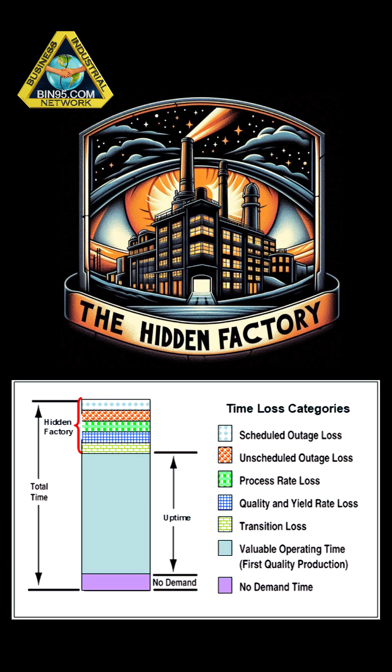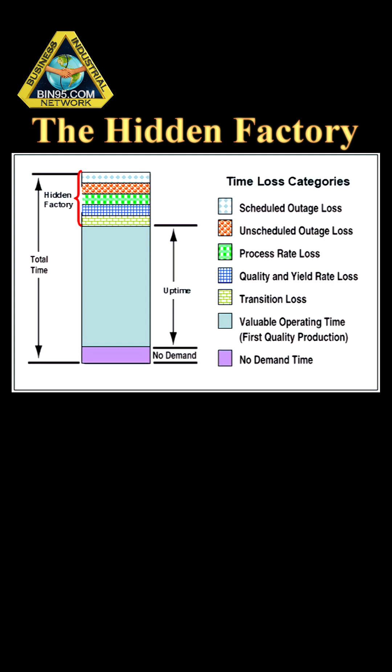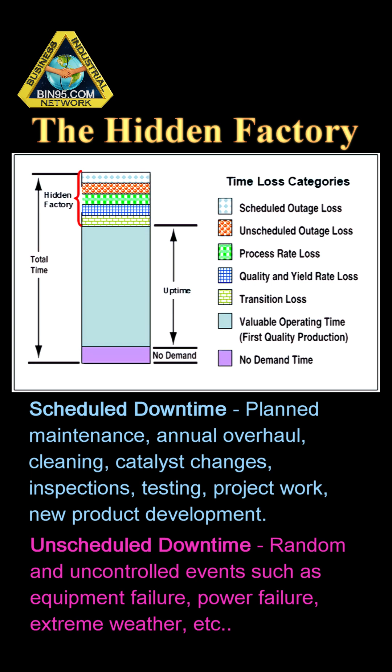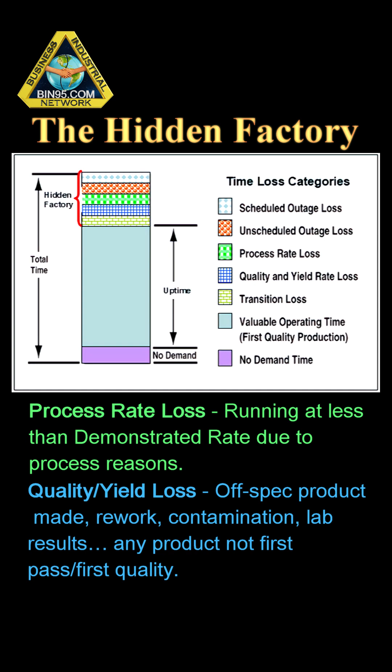By utilizing the hidden factory, plant capacity increases. The hidden factory refers to the production capacity lost due to unnecessary operating time and waste of production rate. It can total more than half of the plant and equipment capacity in organizations that are unaware of their time and production waste. To find the size of the hidden factory, it is necessary to measure actual performance against the maximum rated potential of the operation. The difference between the two, maximum possible and actual achievement, is the hidden factory size.

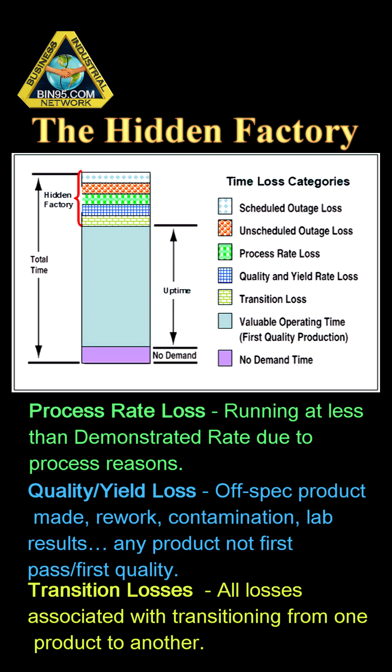As plant uptime increases, so does production, all while maintaining the same amount of time and cost. The increases drive the unit cost down, the return on assets increases, the profit also rises, and because customers receive their orders sooner, their satisfaction levels rise.

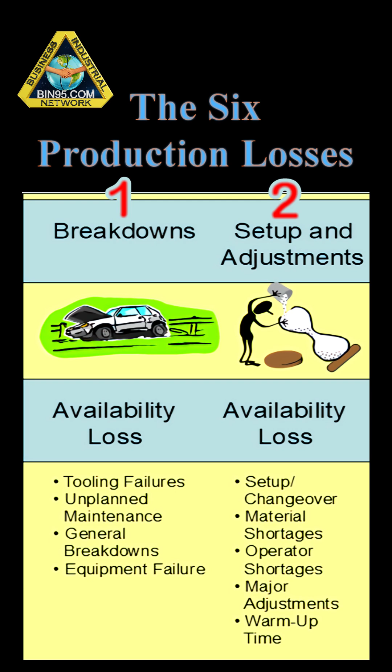The 6 big losses of TPM are not primarily concerned with maintenance performance, as David Sherwin, a professor of maintenance and reliability, advises. The 6 losses of TPM are mainly production losses, for which the maintenance policy is one of several factors analyzed. They do not all relate directly to maintenance.

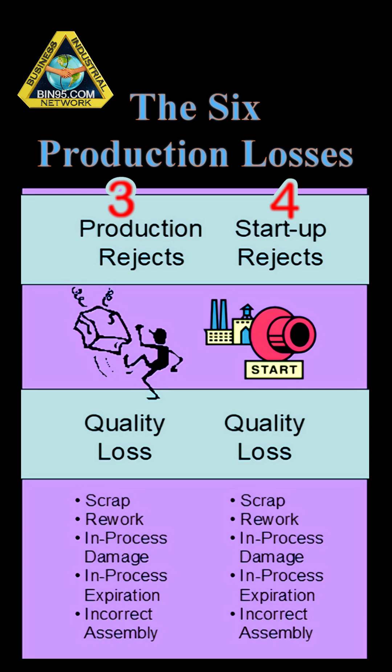TPM contains nothing wrong or detrimental to the company's economics. Still, it is incomplete as a system for maintenance and as a philosophy for equipment and life cycle health. However, it allows maintenance to interact with other functions, including measuring its success, overall equipment effectiveness, a key factor in maximizing profitability.

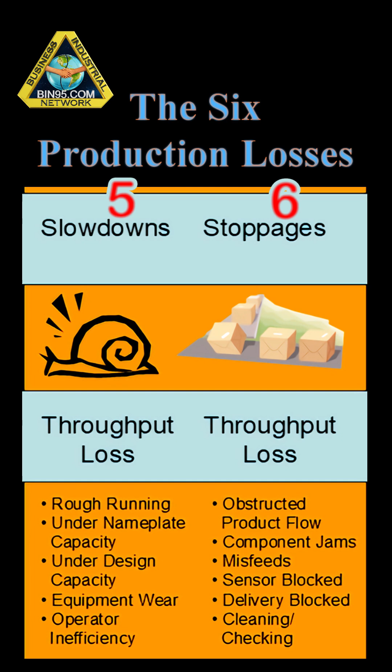The use of waste removal to drive competitive advantage within organizations was pioneered in the 1950s by Toyota's chief engineer, Taiichi Ohno, and Sensei Shigeo Shingo, and it is fundamentally oriented towards productivity rather than quality. Value stream mapping is recognized for uncovering waste in manufacturing, production, and business processes by identifying and separating value-adding steps and tasks from those that are non-value-adding.

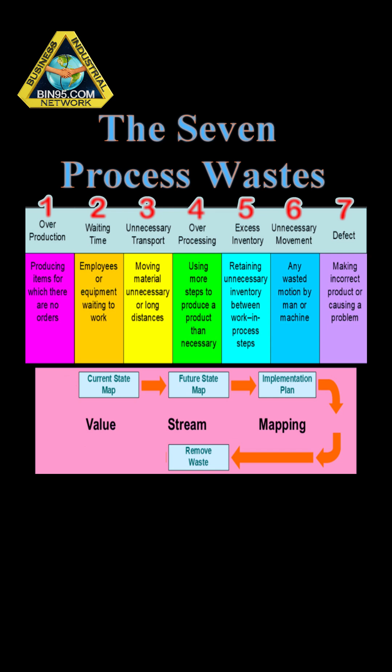A process flow diagram showing all steps in the process, including feedback/feed-forward and error rectification requirements, is drawn to reflect the operation's current state map. From the customer's perspective, the person who will use the output realizes the value. Value-adding is those actions and resources that create value for the customer.

Non-value-adding activities are all the steps taken in the process that contribute no value to the customer but are still paid for when they purchase the product or service. Ask, would the customer be less satisfied with the product if this step were left out?